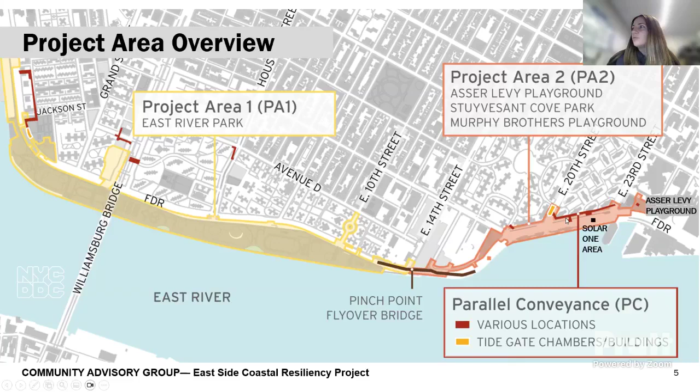We have the overview of contracts, which is largely the same as the last presentation. We do have some updates on specific work operations in the coming slides, but the partial closures still include East River Park south of East Houston Street. The Greenway is closed to East 10th Street. It is still open through to Project Area 2, or Stuy Cove Park.

As mentioned, the Delancey Street Bridge is open. The Corlears Hook pedestrian bridge, we actually got to walk on the other day since the concrete walking surface is now poured, but again, that won't open until the spring. There's ongoing flood wall activity work, East Houston Street retaining wall work, and Ballfield 7 and 8 deep sewer work has started. Ballfield 1 and 2 is open.

We have some photos of the esplanade, which is really great, and the tree planting, so we'll pop those up. We'll get into parallel conveyance later on in the presentation.

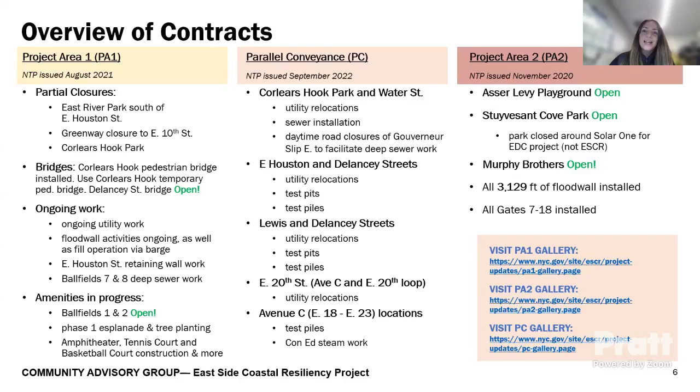And then for project area 2, again, Asser Levy Playground is open, Stuy Cove Park is open, and Murphy Brothers is open, which we're very proud of. If you haven't gone to see them, please do go—they are looking really wonderful.

So for PA1 construction activities update: the micro pile installation and jet grouting is ongoing. Flood wall operations at Montgomery Street and South Street are moving forward, which we're very excited about—jet grouting and utility work for the flood wall. The Corlears Hook Bridge wing wall and curb installation is getting Corlears Hook Park ready for that spring opening as well. The other items we spoke about, you'll see photos of the basketball court coming up.

Then we have the work at Grand Street, which we'll talk about in the next slide, and ongoing activities for the tennis court and multi-use turf construction. The work happening at Ballfield 3, 4, and 5 includes the wick drains, which we've installed in the previous area already and are now building on. For East 10th Street work, we have some photos of the micro tunneling operations in the deck.

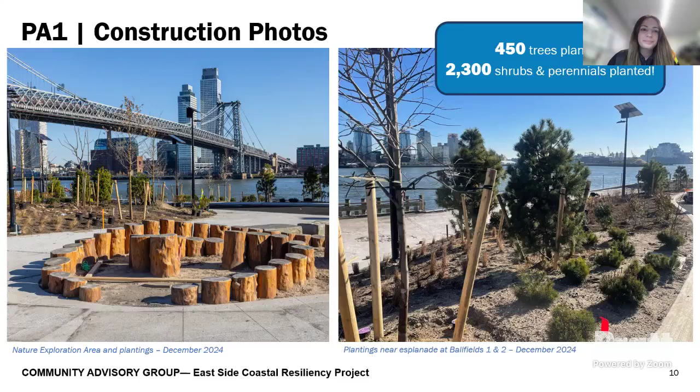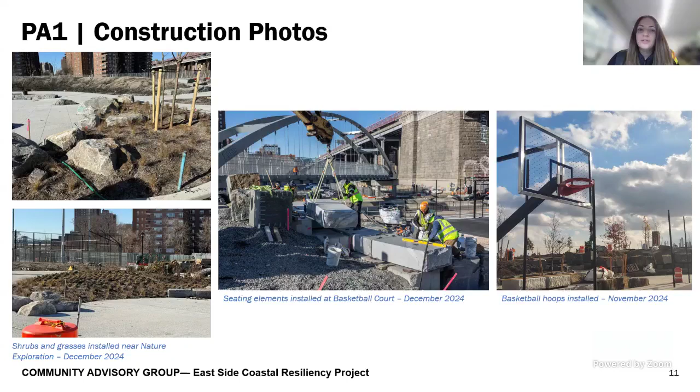These are the shrubs and grasses near the nature exploration area. As mentioned, this is the basketball court area, and we have the seating elements. These huge stones make up part of the seating and the steps that go down to the basketball court. These are the basketball hoops installed, from November. They're really making progress on that.

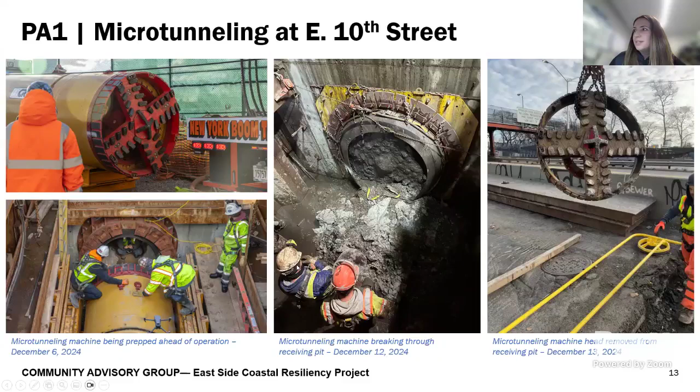From what we've heard, quite a few folks have been asking about the Pinch Point Greenway. So we do have an update on that from DDC. That's a separate contract from ESCR, but as it's a DDC project related to this, we are providing updates until DDC starts providing those updates separately with that team, which will happen in early 2025.

For the Fireboat House and Section 106 process, OMB, DDC, and Parks are working on responses to the alternatives analysis comments received from the consulting party. We just wanted to provide that update. For future amenities openings, we said more amenities south of the Williamsburg Bridge would be opening in spring. I know we're all anxiously awaiting that, and when we have more concrete dates, we will present those as well.

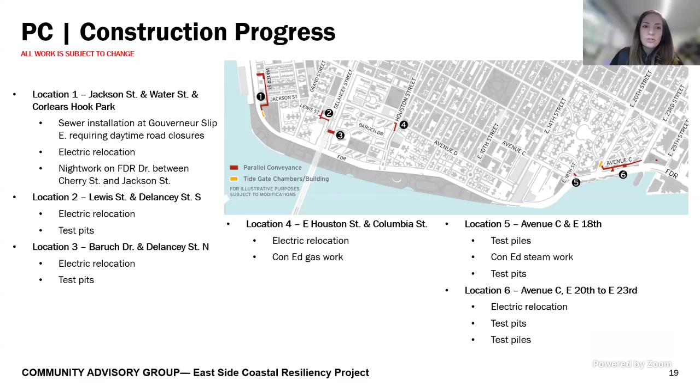For parallel conveyance construction progress at location 1, Jackson Street to Water Street and Corlears Park, we have sewer installation at Gouverneur Slip East, requiring daytime road closures, electric relocation, and night work on the FDR Drive between Cherry Street and Jackson Street, at Lewis Street to Delancey Street, and at many other locations including Baruch to Delancey, East Houston and Columbia, Avenue C and East 18th Street, and Avenue C at East 20th to East 23rd. The majority of that work is still electrical relocation, test pits, Con Ed gas work, and test piles, with most activity happening at location 1.

If we remember, the first portion of this work was on Water Street. The contractor is now on Gouverneur Slip East, which is expected to conclude this month. The contractor will then move to Jackson Street between Water Street and South Street to do the same work done on Water Street and Gouverneur Slip East.

Work hours will be Monday through Friday from 7 a.m. to 6 p.m., and Saturday and Sunday 8 a.m. to 6 p.m. Traffic will be restored at the end of each workday, but there will be a vehicular detour on Jackson Street, and there won't be access to South Street. Vehicles leaving Water Street will not be able to make that right turn and swing around to South Street. They will have to go up Jackson Street, over to Madison Street, and then down Montgomery Street. Jackson Street headed east will only be open to local traffic, and for drop-offs, vehicles will have to turn around at the end and go back up to Madison Street.

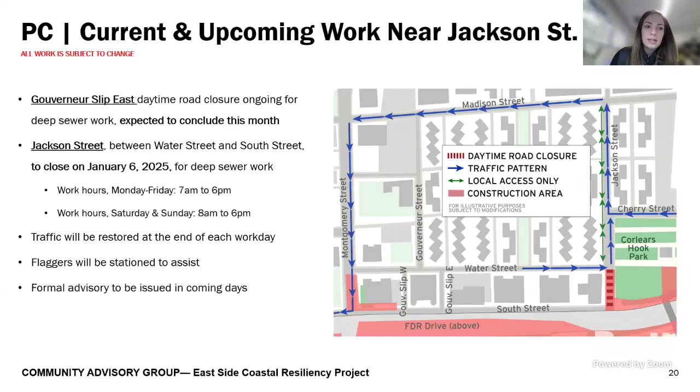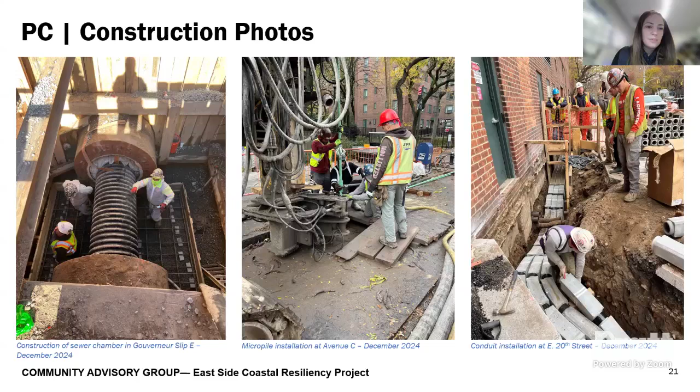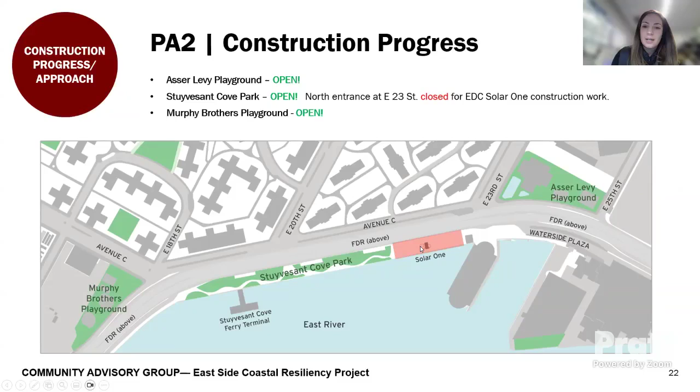For Project Area 2, we mentioned the three parks are open except for the area where they are constructing the new Solar One building.

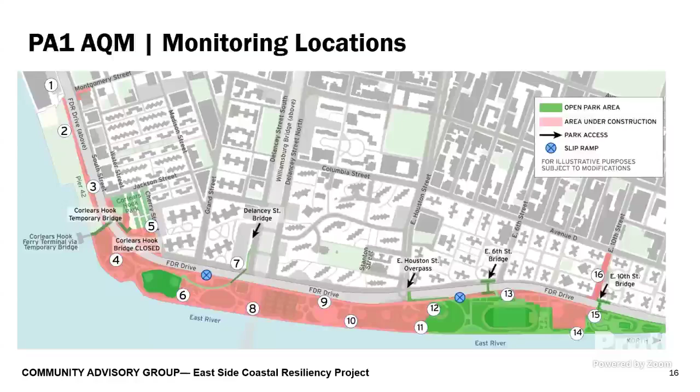And then the second question has to do with the FDR noise, because I have a feeling that most of the complaints you're getting are coming from my complex. And I don't think Dove is on the call tonight, because I think he's the ER representative for the CAG. But anyway, I think what needs to happen is maybe some more verbose advisories, as opposed to just advisories of, hey, night work needs to happen. If Dove's able to get you connected to East River Management, maybe you guys can write a little letter or paragraph explaining why this work has to happen at night and what the work actually is, so people will be a little less prone to complain about it. Because it has been a hot topic in our building's Facebook page.

Luckily, I don't live on the FDR. I live inside one of the inner buildings, so I don't hear the noise. But yeah, I just think that if you guys can do maybe a better job of communication to the building, even if you can't get access to the management office for them to send something out to their email list, even if it's something that you get to me and I put up in the laundry room, just something that people can see why this work is necessary and why it can only happen at night.

Yeah, we've been posting these 'what's going on here' flyers for other operations, so we can work on one with information, a map, photographs, and why this is really critical, plus the expected end date. We will send it around to you, and if we can get access, we'd be happy to post it anywhere or drop it off at the management office. So we can definitely do that. That's a wonderful idea, thank you.

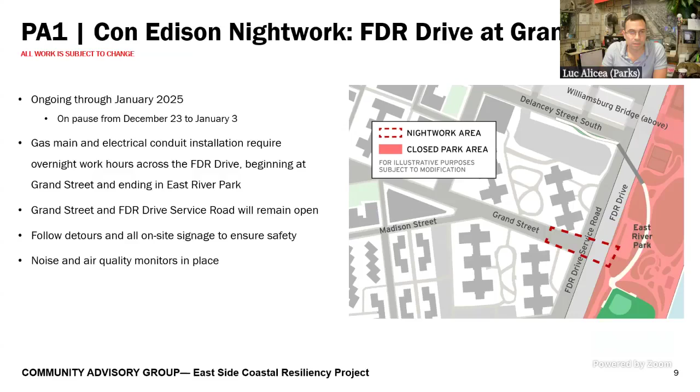Let me get back to you on the specifics. I know there's lighting on the perimeter of the track, but I think you're asking if there's robust flood lighting, and I'd rather give you the precise answer rather than what I think. So we'll get back to you on that, Wendy.

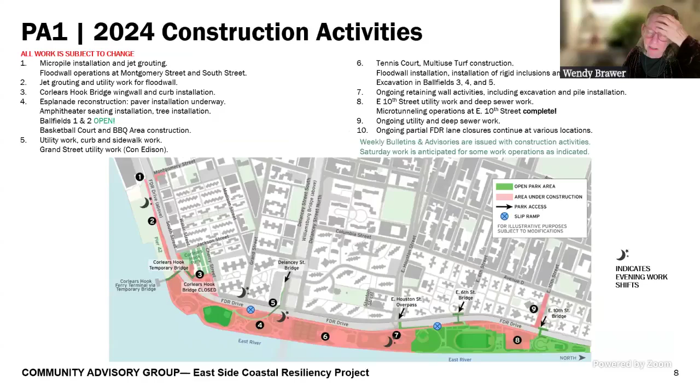I'm glad to see the Pinch Point Bridge is going to swoop out over the water, I think that will be a nice experience. I was really worried about the earlier design, which I couldn't imagine, just how it might affect people at Riis houses, even after all the work was done with the micro tunneling and the 10th Street Bridge, and then this next piece. So I'm glad to see it's going to swoop out, and I assume it won't get too close to Riis houses if it's way over there.

That's good, thank you, happy holidays. Happy holidays, thank you Wendy. I think did Martin have a...

Yeah, there is a petition in regards to getting the track lit. There's a movement for that. The design as such will leave a lot of the track dark, and the possibility of people getting injured or being victims of crime would be accelerated with the darkness. We've mentioned this also in regards to the Stuyvesant Cove Park, that because much of it is not visible from Avenue C, when it is open, it will be problematic.

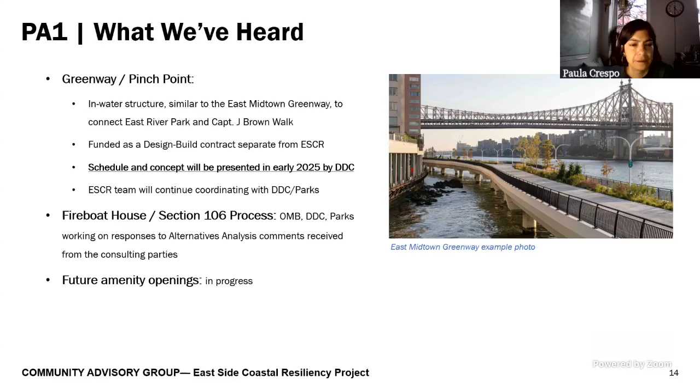Any other questions? Wow, that might have been a record. Don't jinx it, sorry.

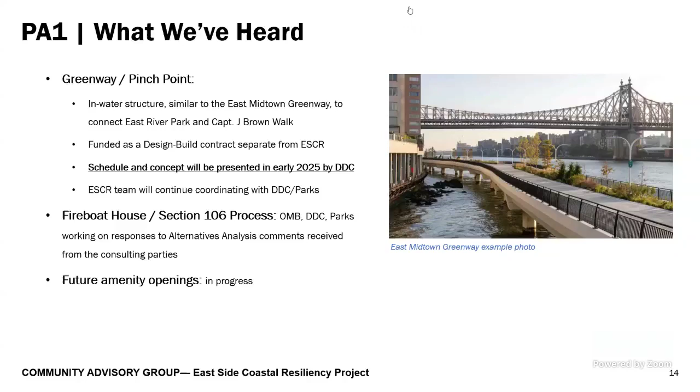Thank you, Desiree. Thank you all, and again, happy holidays and happy new year to everyone. It's really been a pleasure getting to know everybody over the past several years, so I wish you all a happy holiday season. Thank you, same to you. Bye, Desiree. Bye.